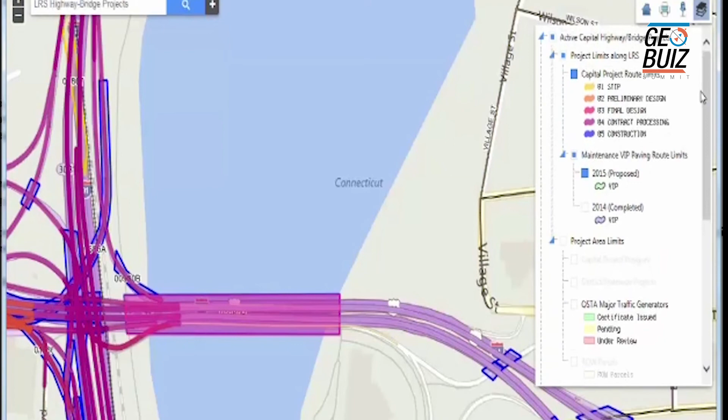Switching gears a bit, you've heard the buzzwords Internet of Things and big data many times today, but those buzzwords are only as valuable as what you do with the information you get out of them. That's where predictive analytics comes into play, where we can take information from IT, engineering, and operational technology and combine it with domain expertise captured in the form of predictive rules to generate actionable information that helps you optimize the operations and maintenance of your infrastructure.

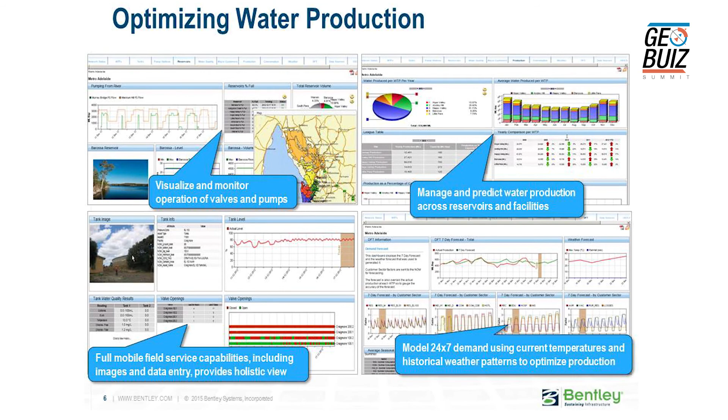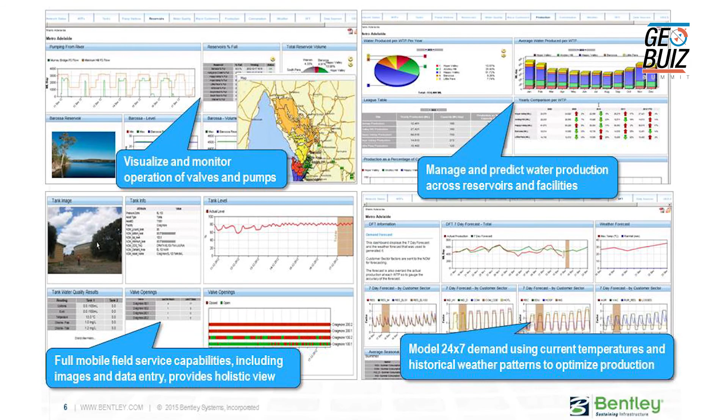One of my favorite examples is this regional water system in Australia. I like it because it combines so many disparate sources of information. They have geospatially located water level sensors to measure the level of water in the various reservoirs. They have geographically correlated information on water demand based on historical data. They have information on electricity prices and how they tend to vary over time. They're also taking into account weather data and weather forecasts, where it's going to rain or where it's not.

They can take all this information to answer simple questions like: how much water do I need to pump from one reservoir to another in order to meet the predicted water demand? And when should I pump that water to most cost effectively move it around given predicted energy prices? Predictive analytics, by answering these questions with confidence, can ultimately help them optimize the operation of the overall water system and save them millions of dollars.

They could even do things like set alarms, so when the actual electricity price exceeds the predicted electricity price, an operator can make an informed decision about whether or not to

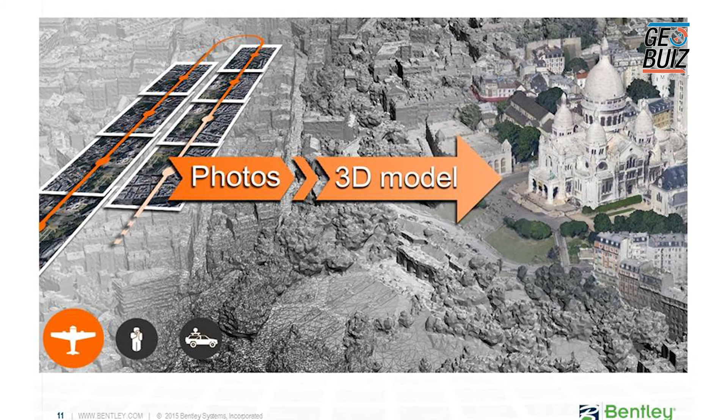suspend pumping operations. Switching gears again, I want to talk about a very interesting technology that can take normal digital photographs from a handheld camera, a smartphone, a camera mounted on a car, a drone, a helicopter, or airplane—pretty much wherever you want to put a camera—and combine all of these photographs to produce a multi-resolution, photorealistic 3D mesh that can capture a model of reality unlike anything else.

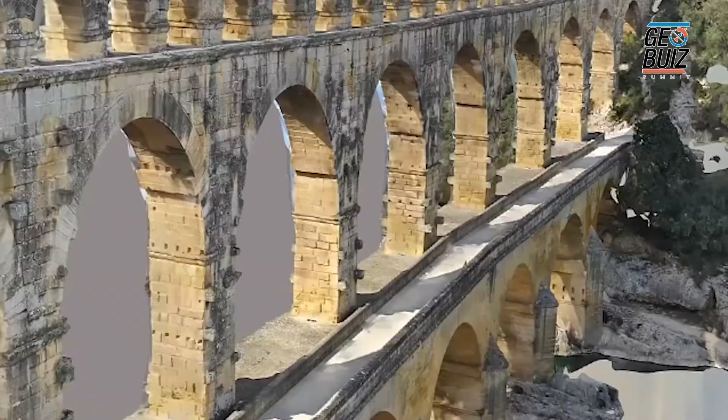This is a perfect technology for bridging the gap between geospatial scale and a BIM scale. Due to its multi-resolution nature, it can capture a model of reality on a scale that ranges from the cracks in an ancient sculpture all the way up to an entire city or even an entire region.

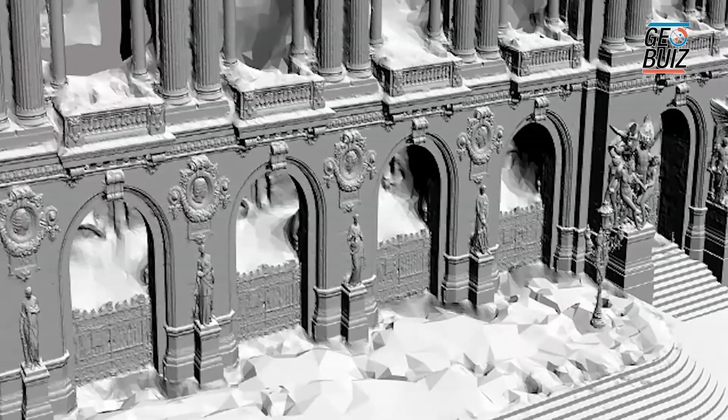And if you need more detail or more accuracy in one area, just take some close-up photos and throw them into the mix. So the ease and cost effectiveness with which these meshes can be generated is really unprecedented.

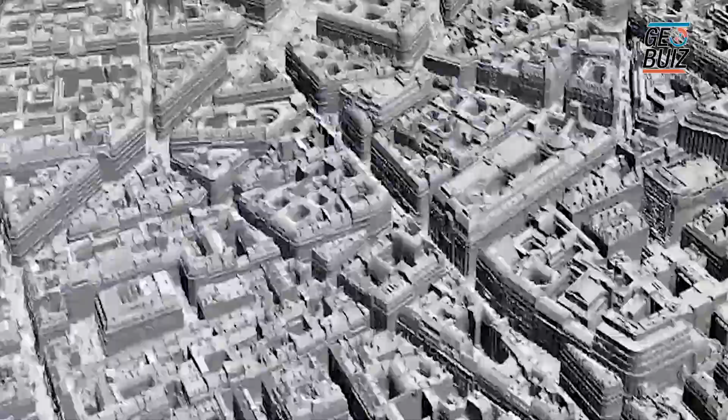We're talking about an entire industrial site for a few thousand dollars, or the entire Paris region, which you're seeing now on the screen. That's 11,000 square kilometers at a ground resolution of 7 to 9 centimeters accuracy for less than $100,000.

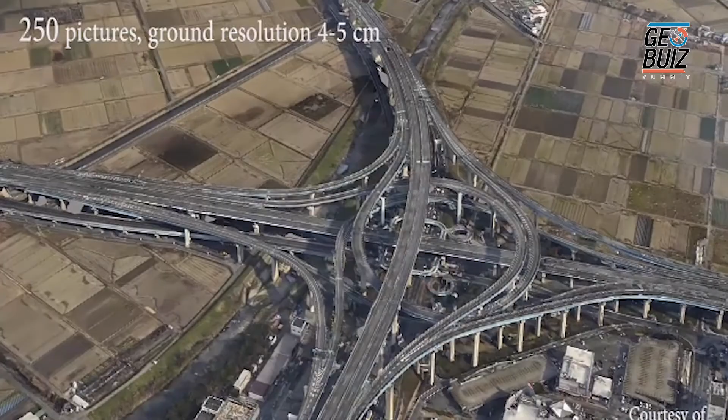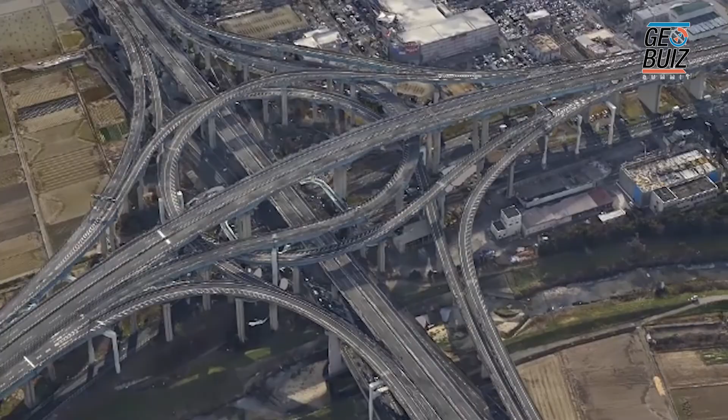So this technology is really changing the way that companies do business, where they might once have done a one-time survey to get a very accurate, albeit limited, model of a site. They can now generate these reality models on an almost continual basis, and get a much richer context and a more realistic view of the site.

This is made possible because they don't need to buy a bunch of software and buy an army of drones and hire a bunch of drone pilots, but there are innovative companies that can essentially provide these reality models as a service.

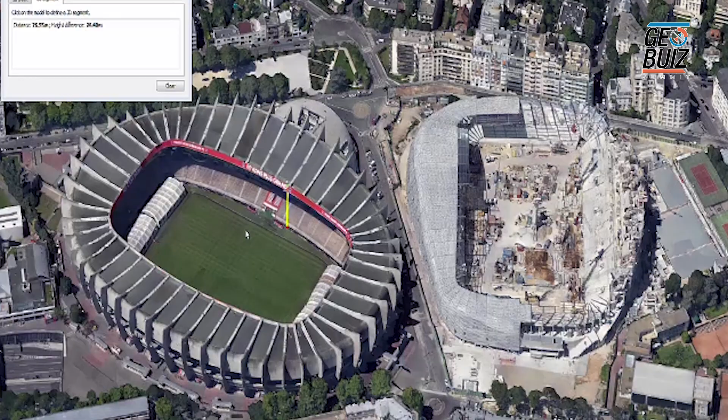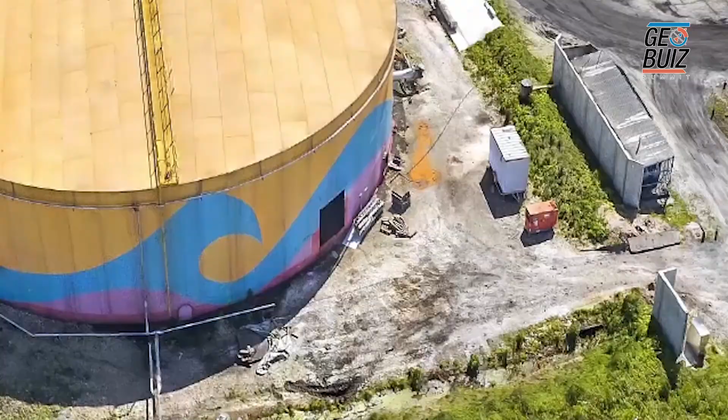So this data can also be integrated with data from traditional GIS and BIM sources. It can be edited for touch-ups or to reflect changes and proposals. And it can be an ideal starting point for traditional modeling. So you can imagine that rather than starting from a blank canvas, you can jumpstart your BIM model with an ultra-realistic context that's got unprecedented accuracy and photorealism.

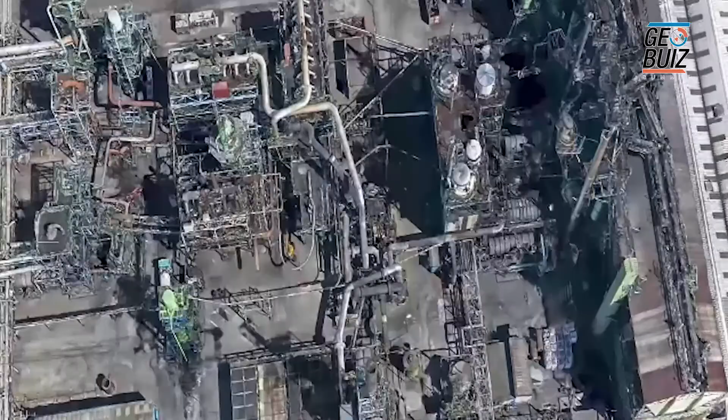Another great thing about this technology is that it's kind of future-proof, in that as photographic sensors advance, and they are all the time, and as computing power increases, you're going to get more and more detailed models in less and less time for less and less cost.

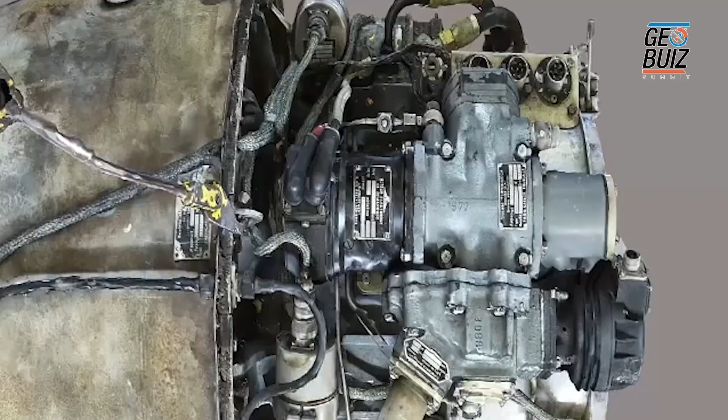So this technology is truly something that can be useful at a geospatial scale of kilometers and even down to the sub-millimeter scale of mechanical applications.

So, in summary, I've talked a little bit about how the obvious thing, the geospatial context, can provide greater clarity and insight and value to normal business systems around sustaining infrastructure. I've talked about how predictive analytics can create actionable information to help you optimize operations and maintenance.

And I've shown you this, what I think is pretty cool technology of these multi-resolution 3D meshes that can be generated from photos in a variety of sources. I mentioned mostly photos, but these can really take in other laser scans and other forms of information into account as well.

And I'd like to close with a few words about the bright future. We've talked about all these technologies that are advancing, of cameras and batteries and drones, and I think the possibilities are really endless for this stuff.

You can imagine someone donning a hard hat, instrumented all around with sensors, doing a walkthrough of a building or industrial facility, and walking out the other end with a reality model that captures in infinite detail everything that they just walked through. You can imagine a domain expert sitting at his desk doing inspections of an offshore oil rig using reality models that were generated from automated drones both below the surface and in the air.